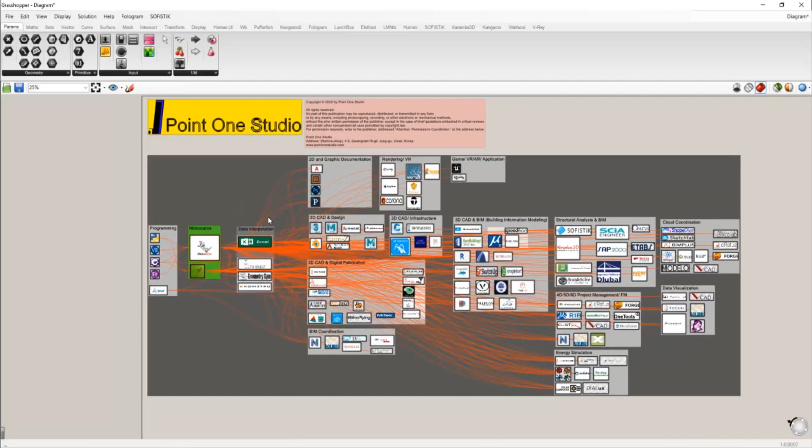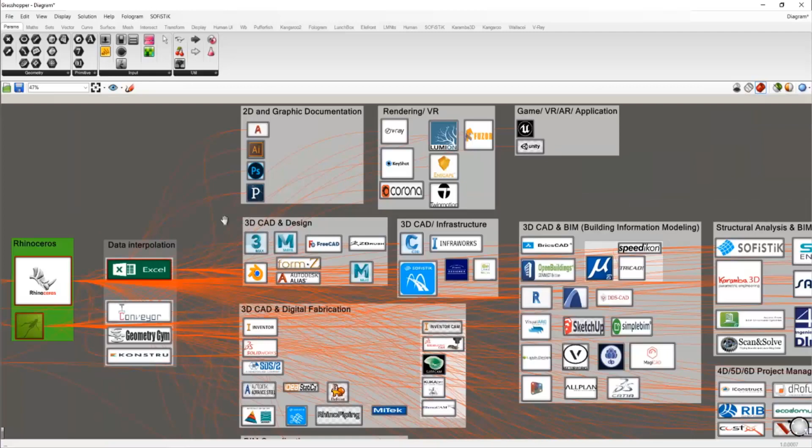So to explain my opinion about Rhino, I have drawn here a simple mind map with software icons. So let's go through each category, and I'm going to demonstrate why Rhino is important. So as you can see, in the building industry, we have many softwares we use between the companies and between the disciplines. And of course, if you look at this data flow, it's quite complex.

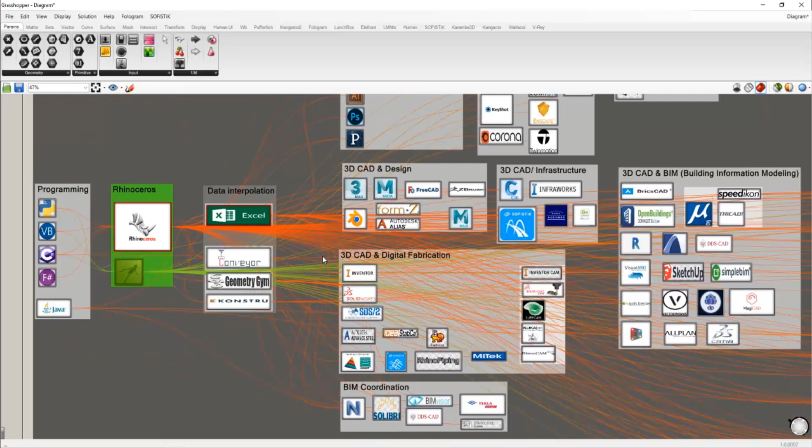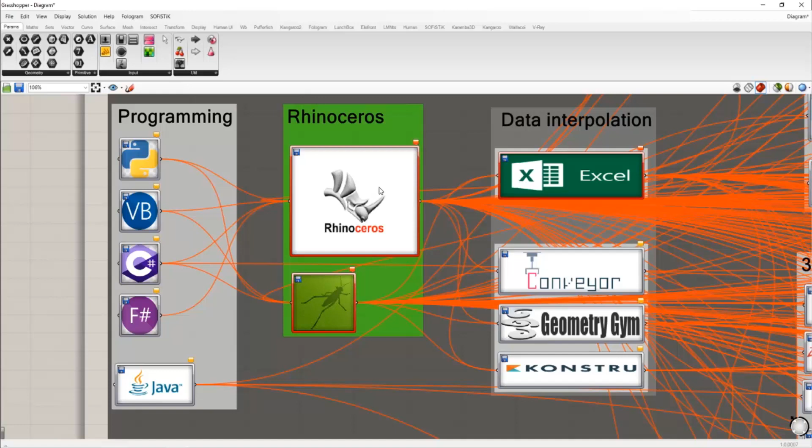I'm just curious myself how much data would be exchanged between the disciplines. Without specifying the format, it's already a very complex mind map. You can take a look. So Rhino is originally developed as a 3D CAD solution, such as for furniture design or product design, and they have extended their function specifically for architecture and engineering in the last couple of years.

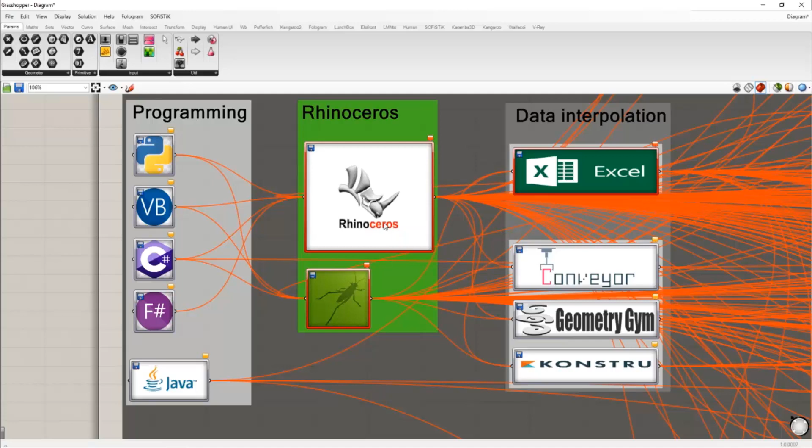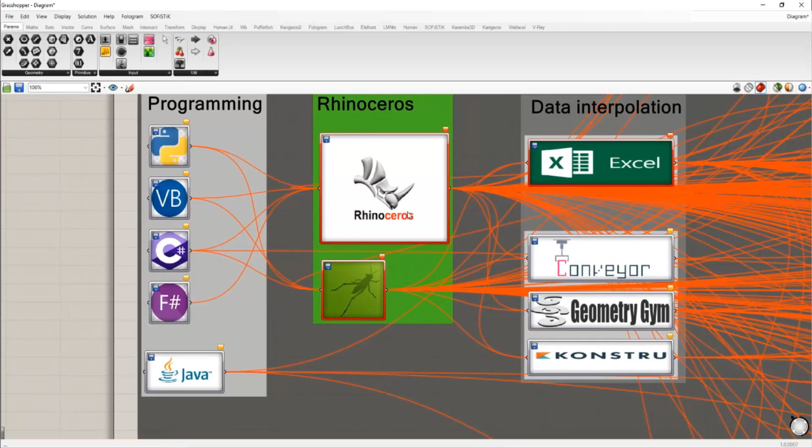And especially since Grasshopper was developed for Rhino, there's huge potential to automate workflows for architects and engineers, as well as designers. Rhino supports different languages, and for example, you can program with Python or Visual Basic, and also C#. And there is also current development with F#. You can integrate with Rhino, with which you can automate your workflow.

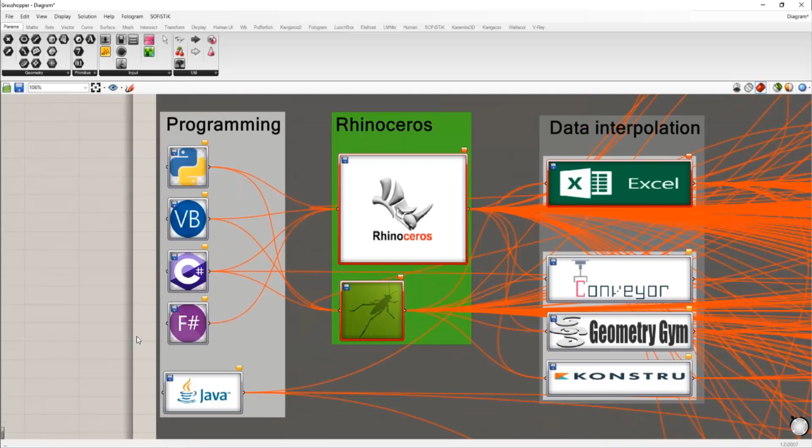Java is not supported, but if you use Java programming, of course, you could maybe use some of the other applications such as Processing, and the Processing result can also go back to Grasshopper. So of course, there is C++. You could also use it, but Rhino doesn't support those languages. Basically, these four languages are the main ones supported by Rhino.

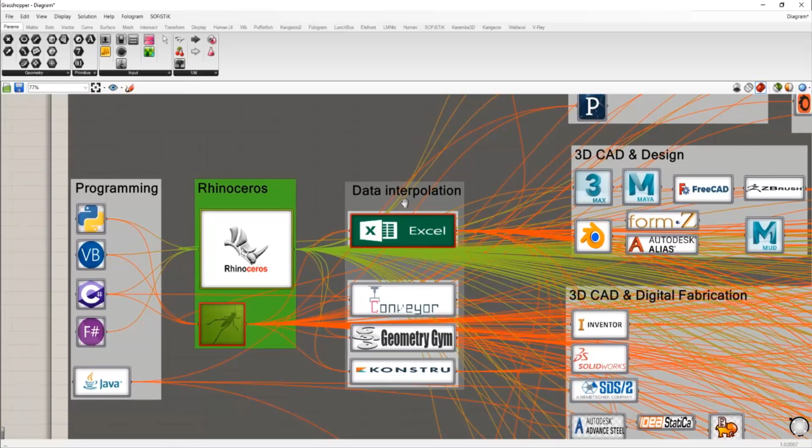And Grasshopper is visual programming, so it supports huge possibilities or potential for the AEC industry. And if you look at the data interoperability, Excel is always one of the key software we can use to transfer different data.

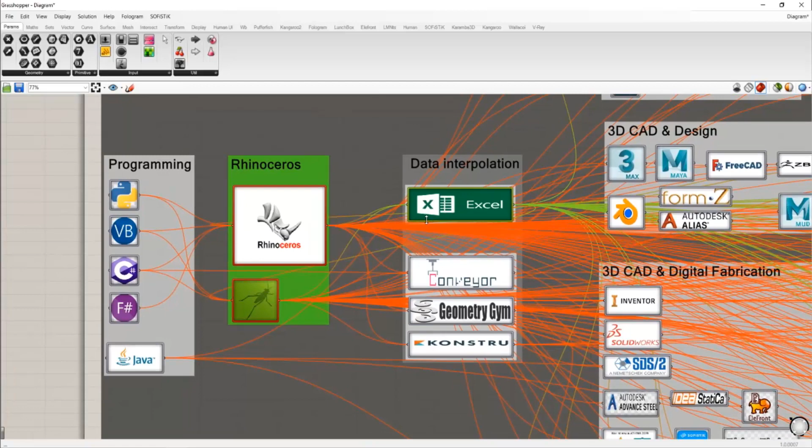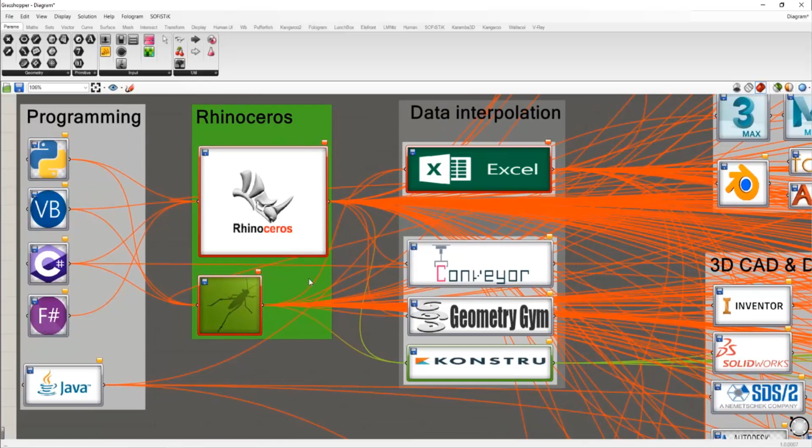And nowadays there are many other packages, for example, Conveyor by Proving Ground or Geometry Gym or Konstru, they are very good solutions that offer Rhino or Grasshopper's output to interoperate the data with the other softwares.

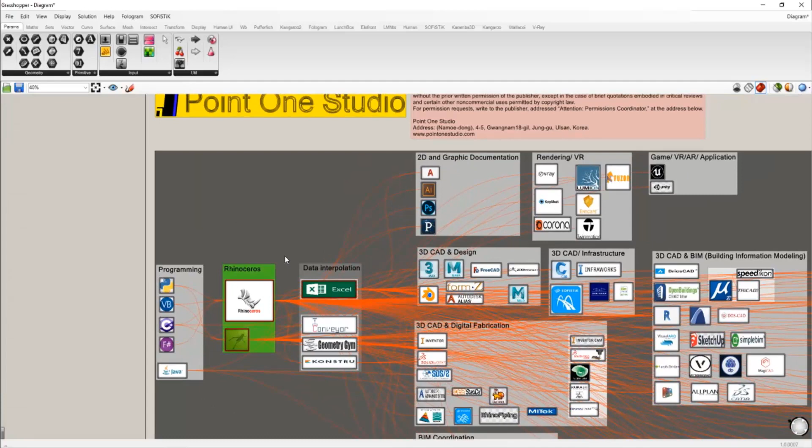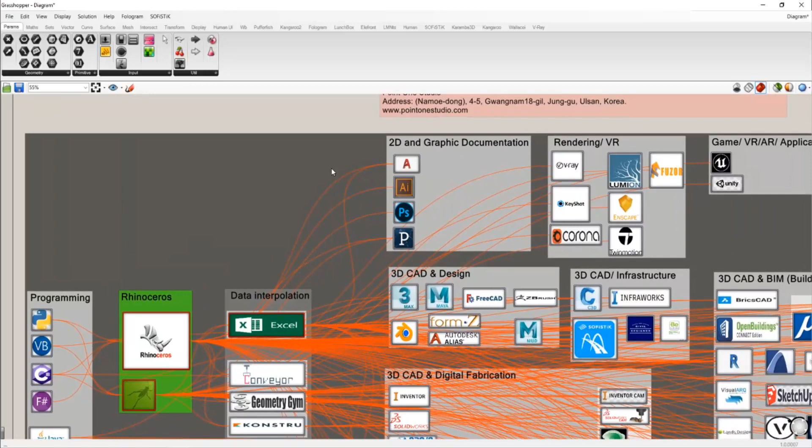Of course, Rhino is mainly a CAD system, but you also have the possibility to have many add-ins, especially for building information modeling. And I'm going to talk about each category here. Of course, for graphics and 2D drafting or documentation, we could also use Rhino to AutoCAD, or Adobe Illustrator or Photoshop, or we can also integrate between Processing and Grasshopper for graphic design.

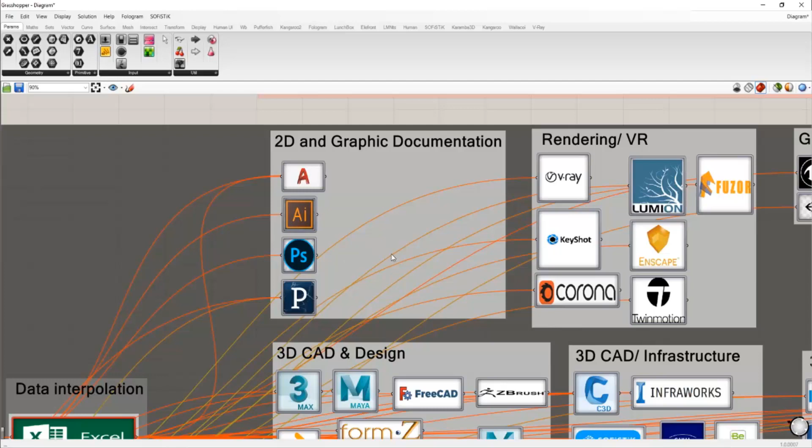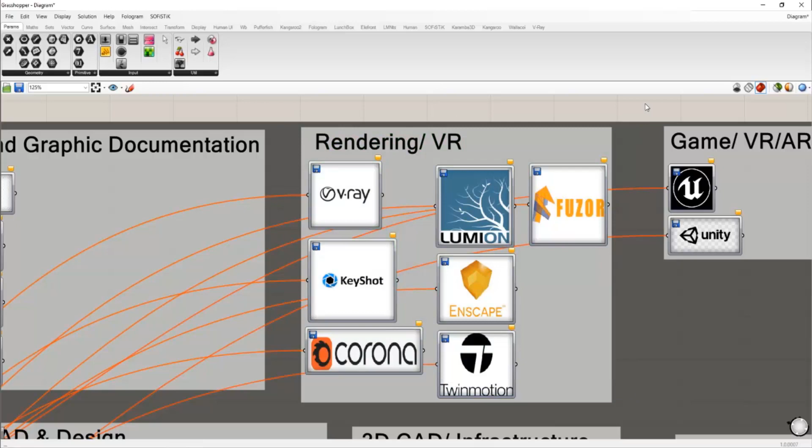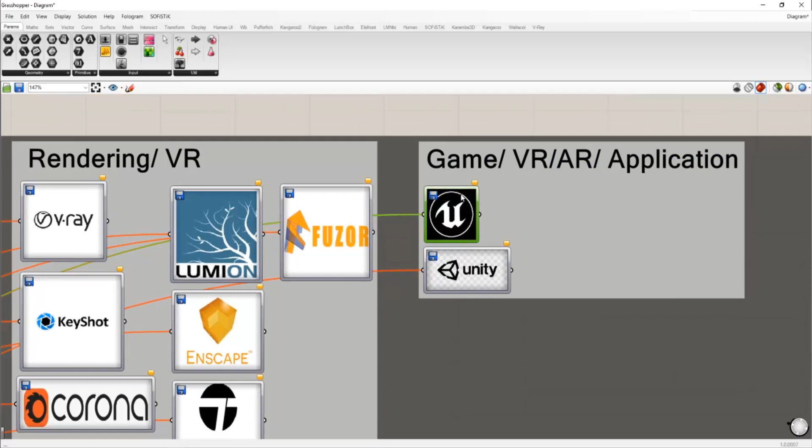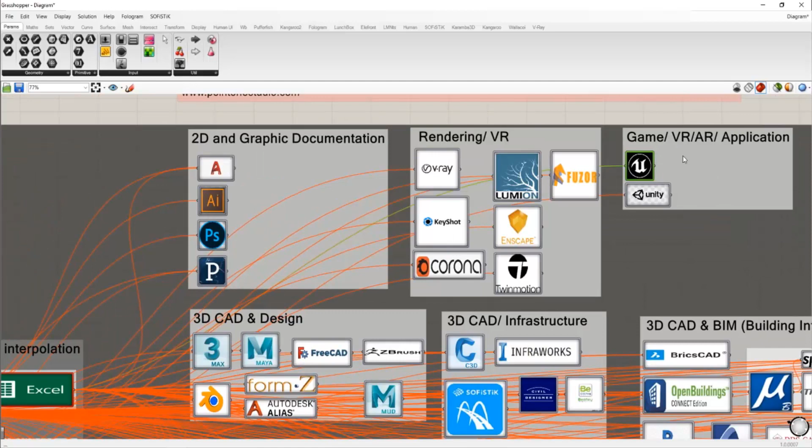And Rhino also supports many different file formats, but especially for rendering, you can be even more flexible with Rhino because Rhino is very simple software. As you can see, most current real-time rendering engines support a Rhino plugin. And also currently there is Rhino.Inside, which works for Unity 3D, or there is Datasmith, which links Rhino's data directly with Unreal Engine. So you can also use your Rhino model in a gaming engine.

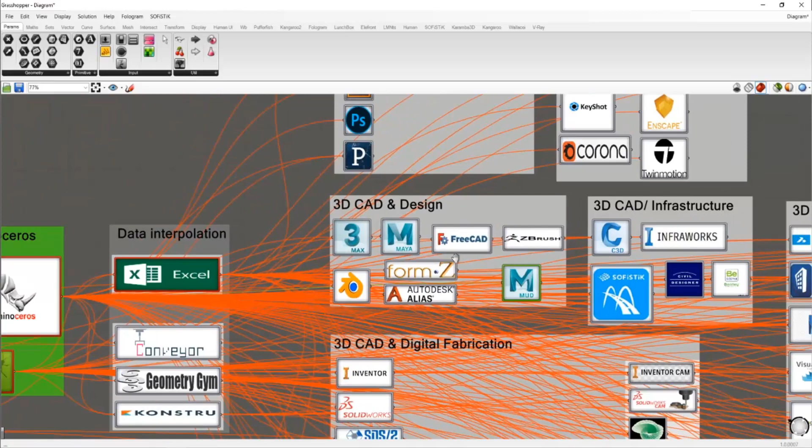Rhino supports many different formats, so we can work together. We can coordinate 3D CAD files from Rhino with 3ds Max or Maya or even Blender, form-Z or Autodesk Alias. And there are many, FreeCAD or ZBrush or Mudbox for 3D sculpture, for artists who can go to an even greater level of detail in their artistic work. And also this Rhino CAD file can be worked with infrastructure software.

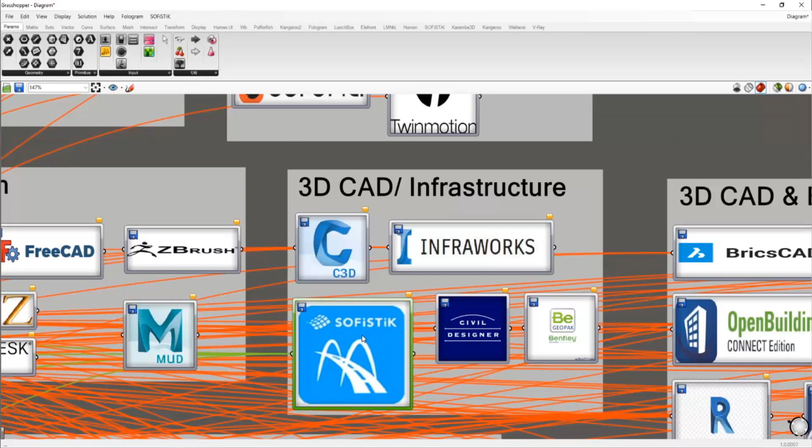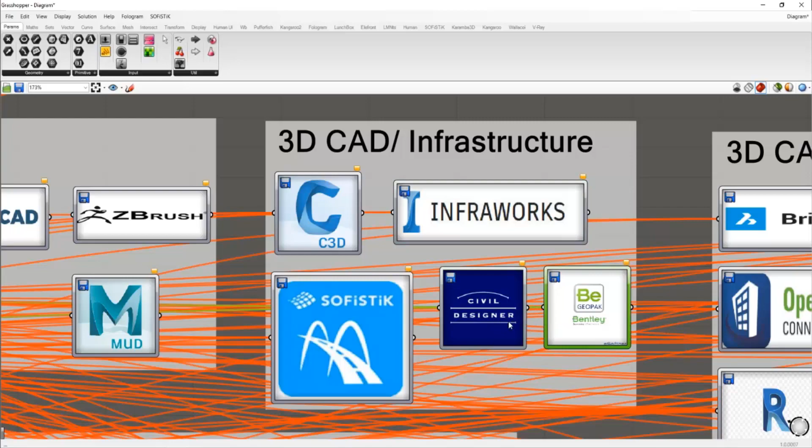Currently, Sofistik developed a Grasshopper plugin for Rhino, and it's really good for bridge design. Rhino supports a variety of CAD formats, so we can also use Rhino's output in Civil 3D or infrastructure. You can also use it for civil design. Basically, we can export a 3D DWG file from Rhino, which means we can use it in any other civil or infrastructure software.

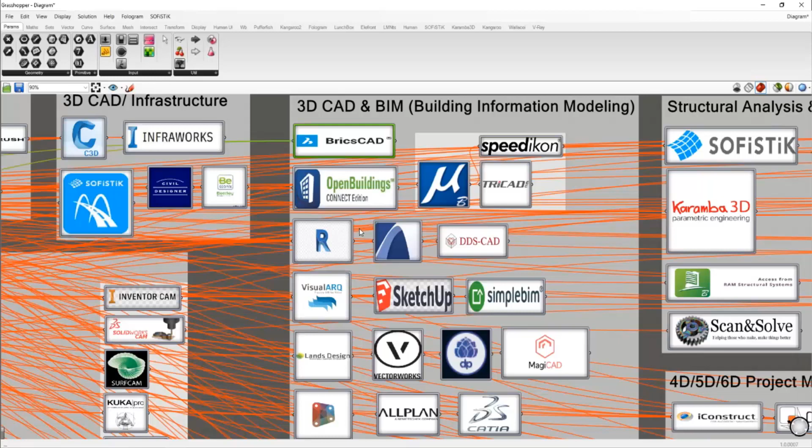What is really interesting for me is also the building information modeling methodology. Many BIM authoring software nowadays support Grasshopper integration with Rhino, especially BricsCAD, or Rhino 7 work in progress. It's called Rhino.Inside, which is going to be integrated with Autodesk Revit. And also the Grasshopper plugin for ArchiCAD works really well.

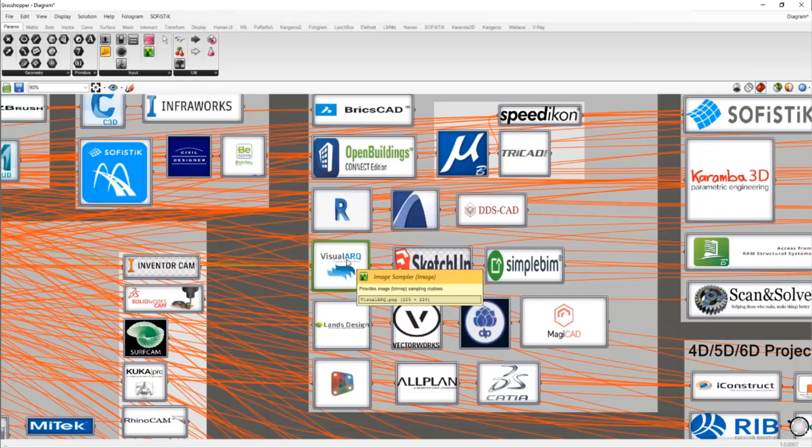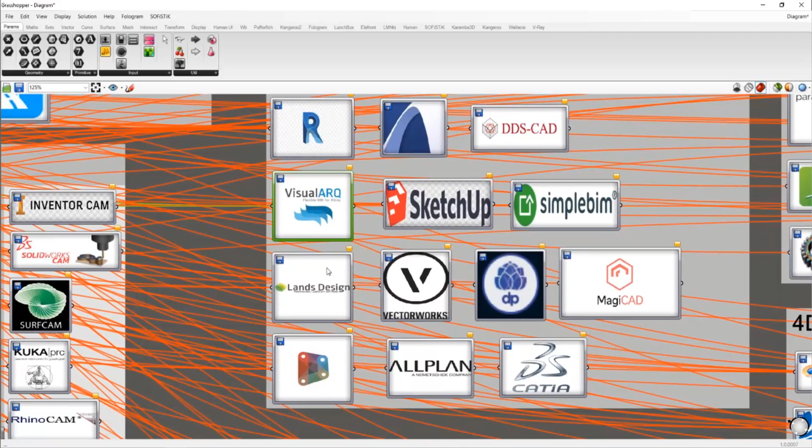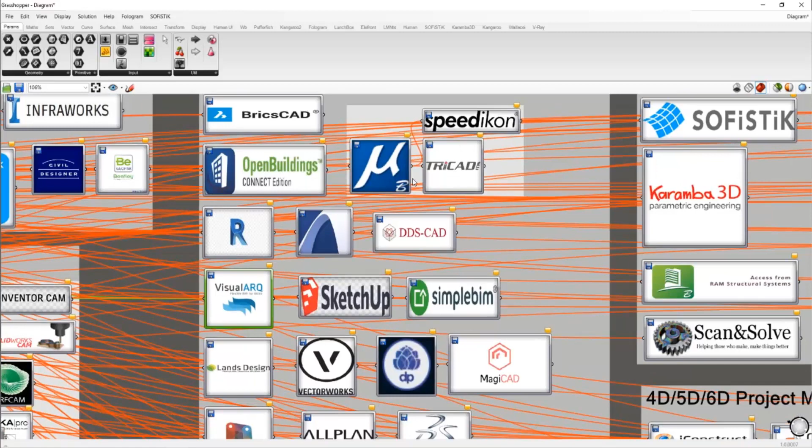VisualARQ is another Rhino plugin, with which we can use the Rhino model as BIM elements. So we can put attributes or IFC classes or parameters on Rhino elements, and we can use it as a BIM software. It also supports land design or landscape design and any kind of format. If we use Rhino, you can also script an IFC exporter yourself, and Rhino elements can be used for any kind of BIM software, because BIM authoring software mainly supports the IFC file format.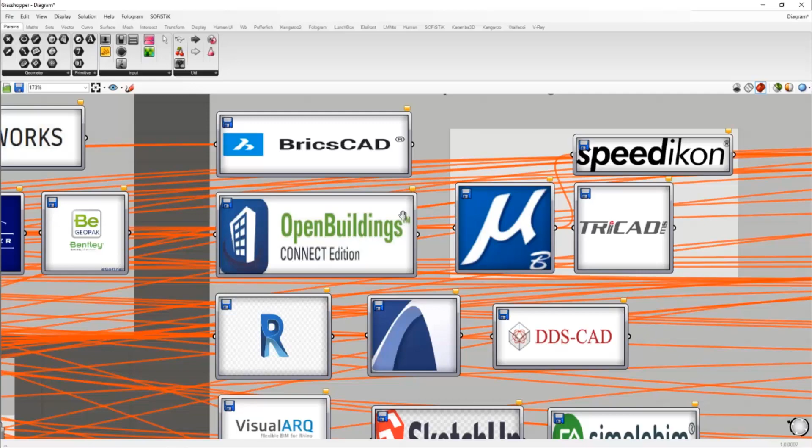For me, I'm very interested in OpenBuildings. They have currently developed quite a lot of BIM functions on top of MicroStation. And when I tested it with Rhino, when you import a Rhino 3DM file into OpenBuildings, it supports all the layers from Rhino. Which means even though there is no direct connection, we can basically use the Rhino file to work with building information modeling.

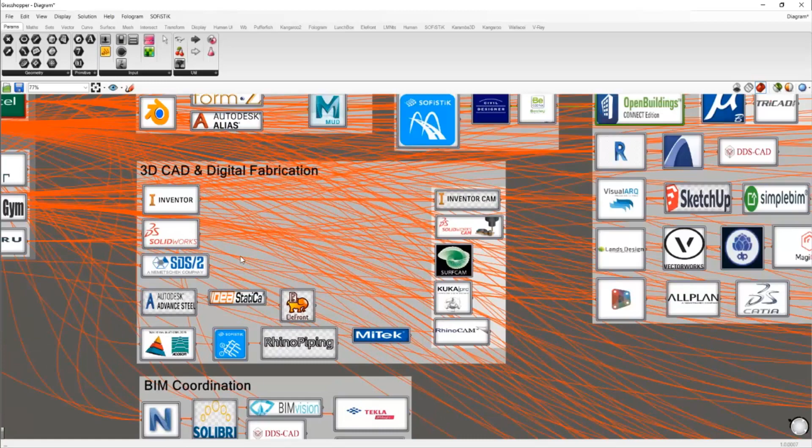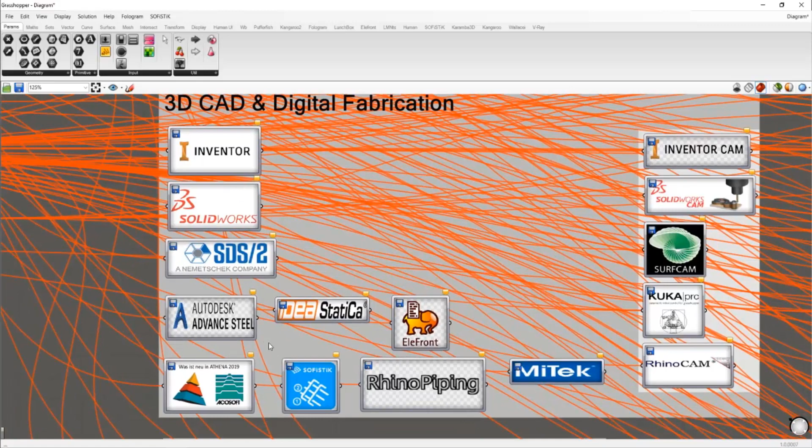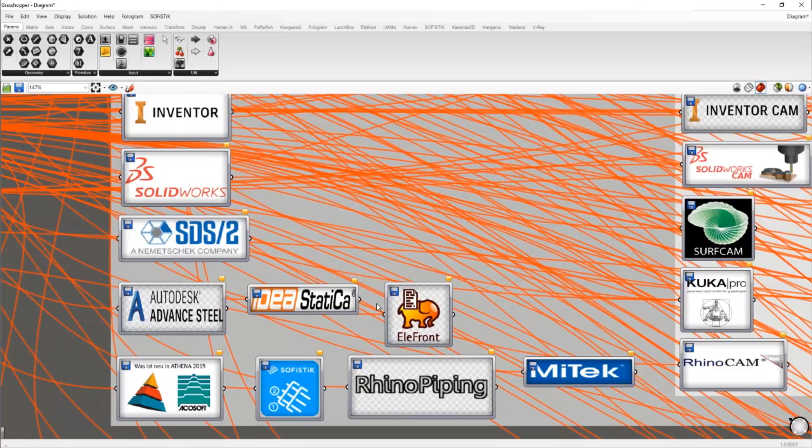And in 3D CAD here, there's Inventor or SolidWorks or SDS2, Autodesk Advance, or here Acosoft's Athena, which is really good for curtain wall kind of prefabrication, almost final detail, LOD 400 or beyond, so we can really finalize your detail. And most of these software basically read the 3D DWG file or Rhino file format, so you can really make your detailed model with Rhino to be able to use it for digital fabrication.

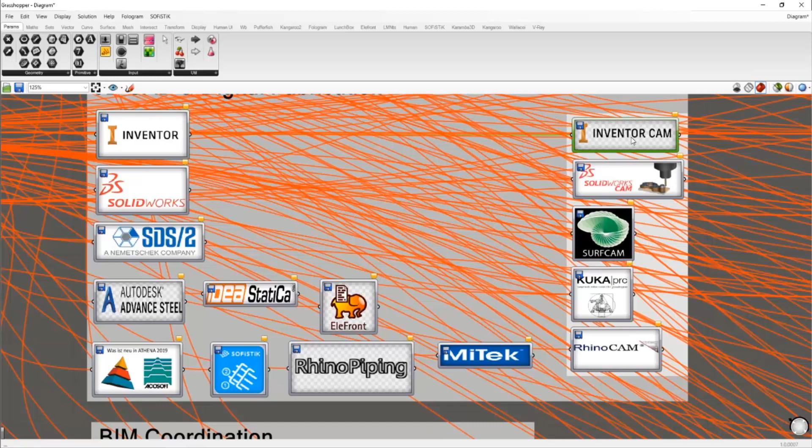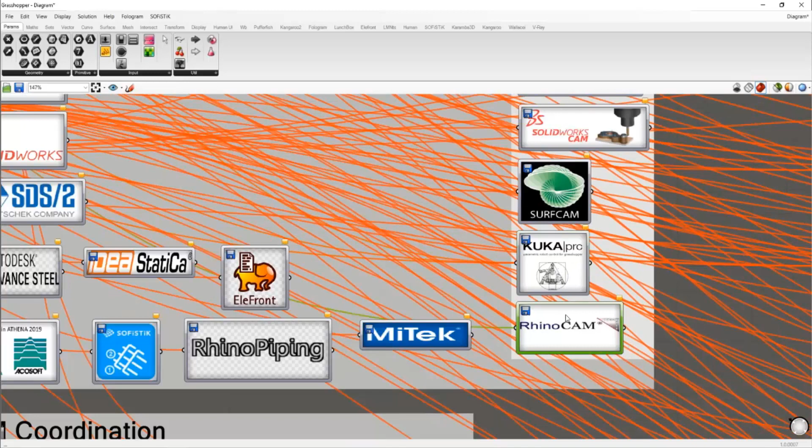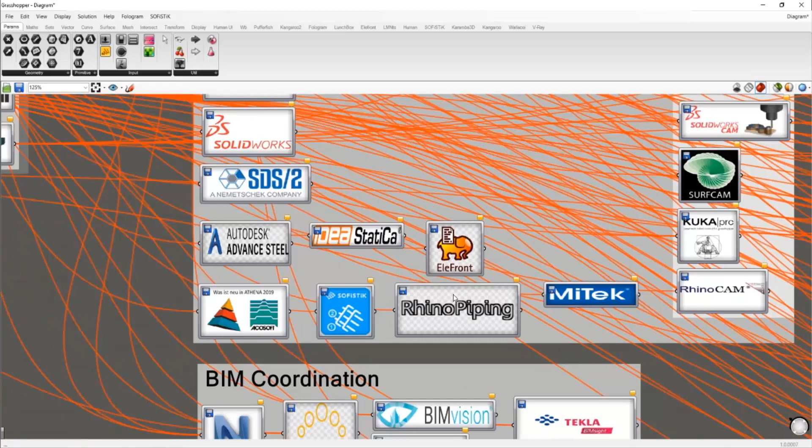So we can import the Rhino model to Inventor, and we can use Inventor CAM, or SolidWorks CAM or SurfCAM. Also Grasshopper and Rhino have a KUKA plugin, so you can use it for robotic fabrication, or you can simply use RhinoCAM for your milling machine. Or from MiTek from Canada, you can also use the Rhino model for very detailed timber structure models, or there is also development of MEP components, piping components, from Rhino. So you can achieve really detailed models with Rhino.

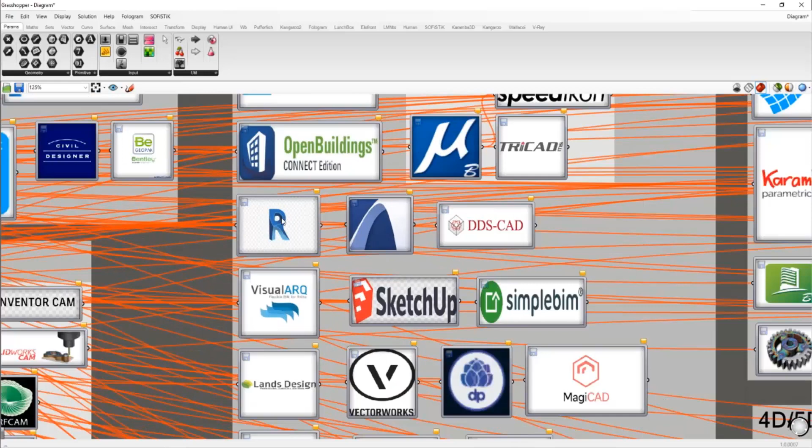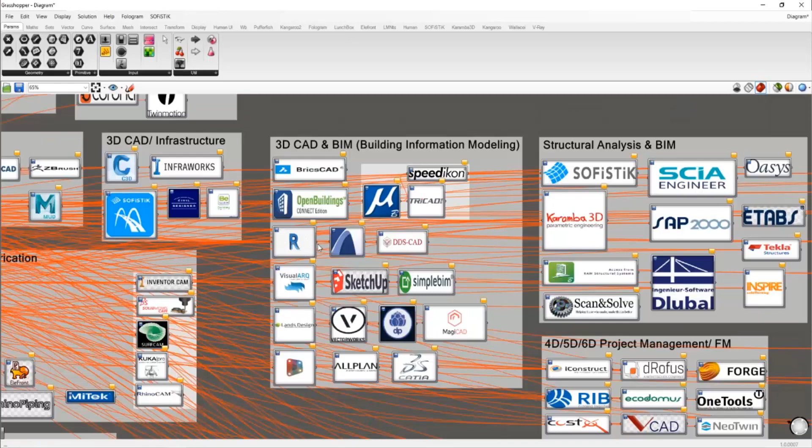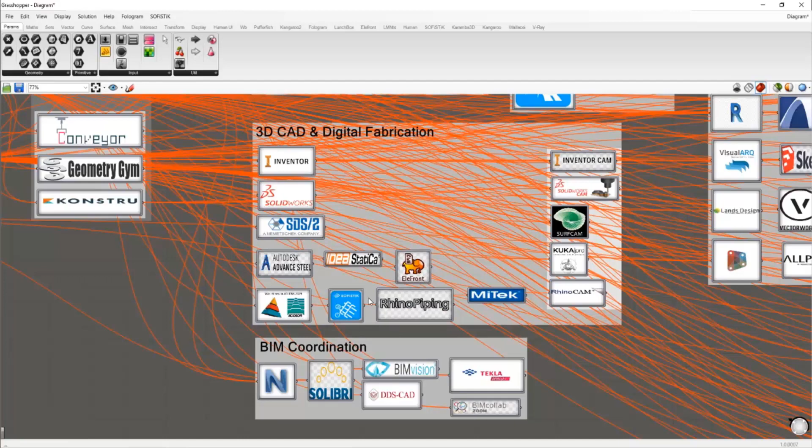Sometimes if you use just standard BIM authoring software such as Revit, it's really rigid and there's a limitation to making a very detailed model in Revit. Of course you can make it, but it's not very efficient. So using more precise CAD software such as Inventor or Rhino, you can deliver an almost as-constructed model for your finalized detail.

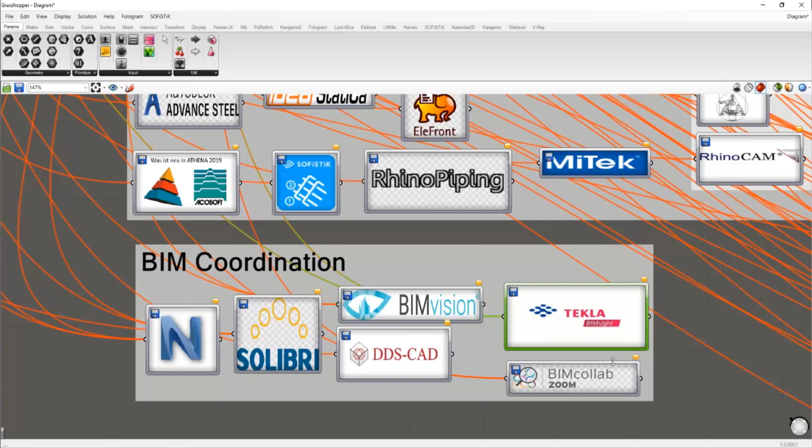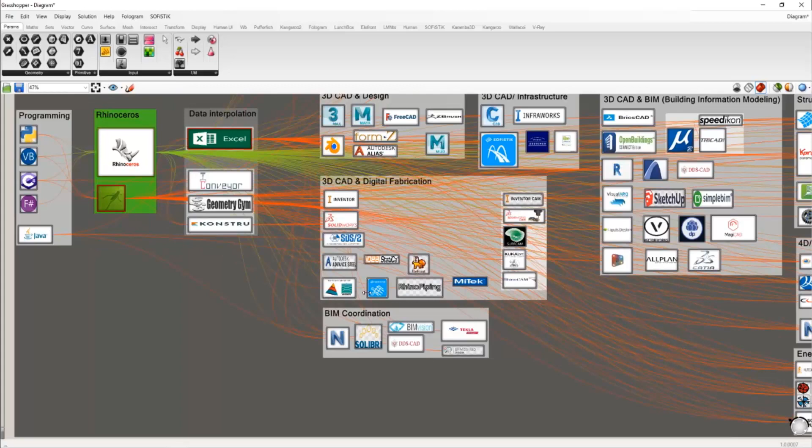Also, the Rhino model can be coordinated in Navisworks, or you can export 3D DWG to use in Solibri, or you can script an IFC export to Solibri and coordinate your Rhino model. Or there is BIM Vision, DDS-CAD Viewer, Tekla BIMsight or BIMcollab Zoom. They mostly support IFC files, or DDS-CAD, Solibri or Navisworks support 3D DWG files. So you can simply export your Rhino model to coordinate with different BIM software or 3D CAD software.

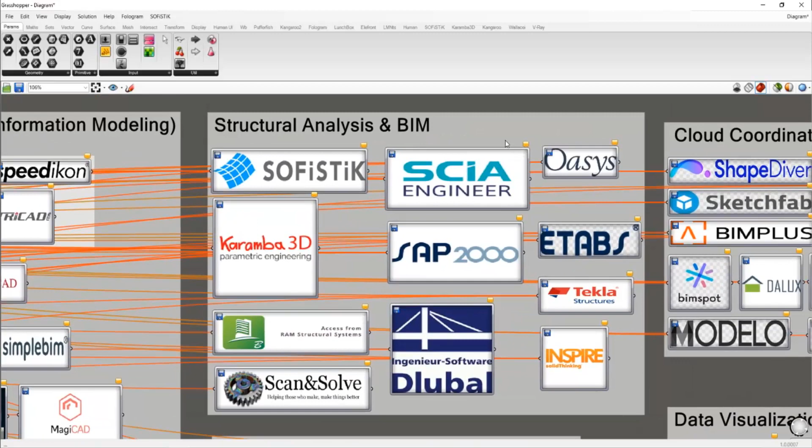What's very interesting is also that Rhino currently has many structural analysis software such as Sofistik or Karamba3D, SAP2000 or SCIA Engineer, or ETABS, or Dlubal's RFEM. They all now have a Grasshopper plugin for Rhino, so you can directly link your structural calculation model to that calculation software, static software, which is also very nice.

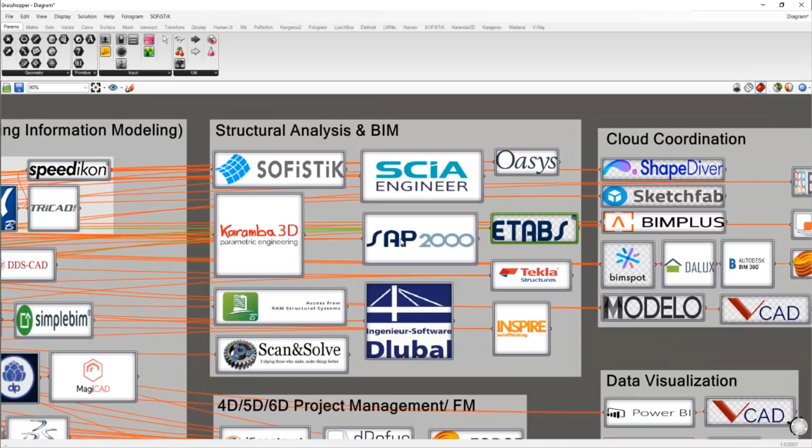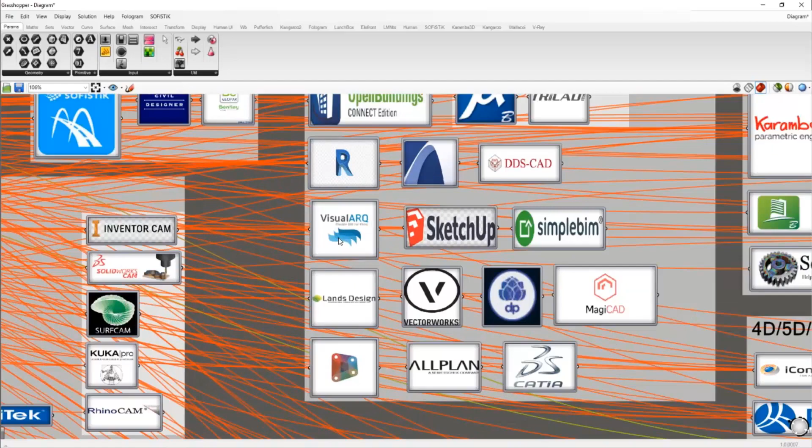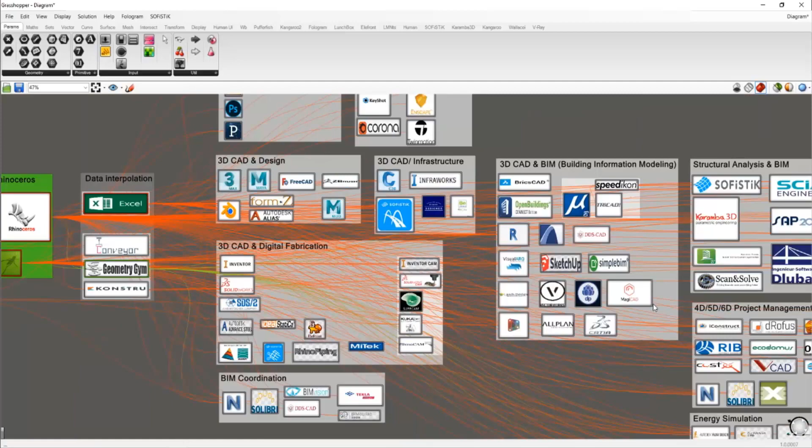And of course, these 4D, 5D, 6D simulation or project management, as well as facility management software, they are not really related to 3D DWG file or 3DM file, but since Rhino can export IFC file with certain plugins, for example, VisualARQ, or if you use Geometry Gym, you could convert your Rhino model to IFC file so that you could use your Rhino model for project management software such as iConstruct for Navisworks, or dRofus, or Autodesk

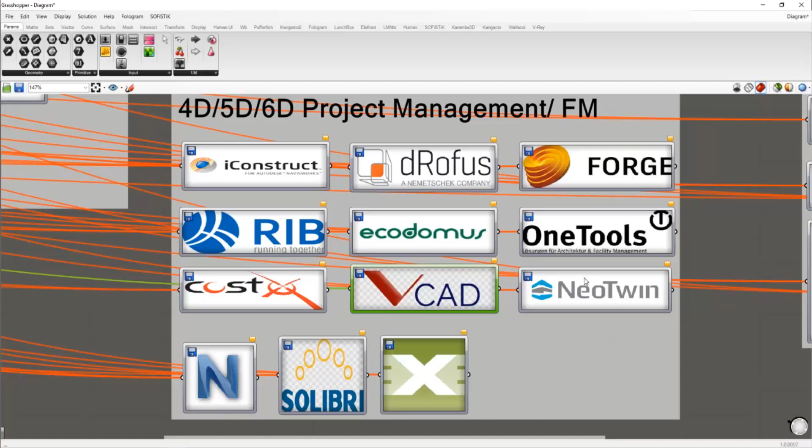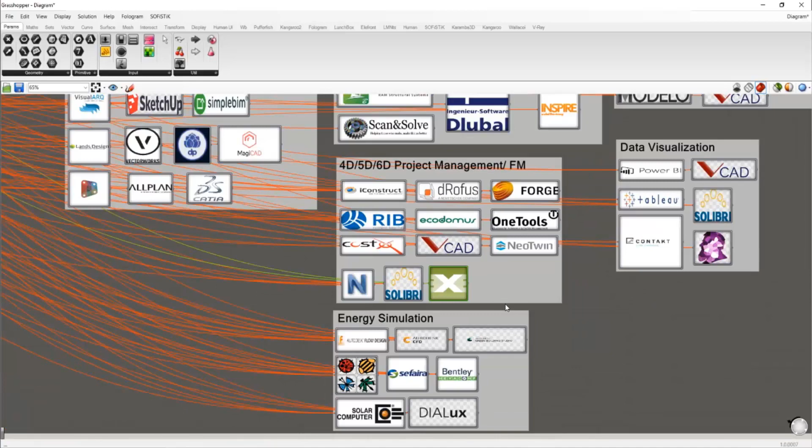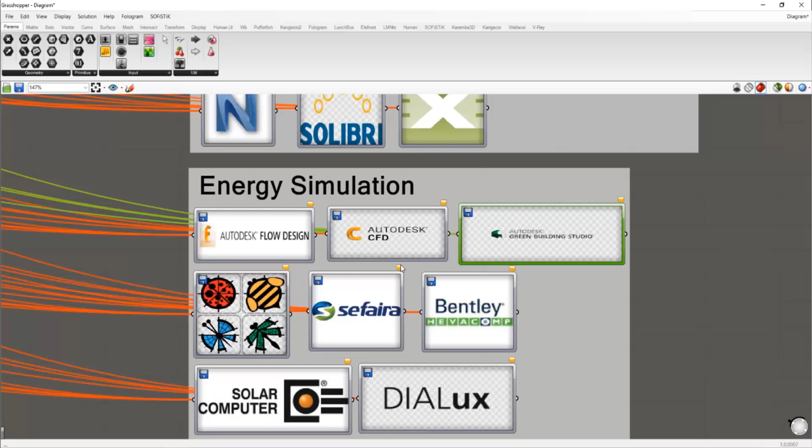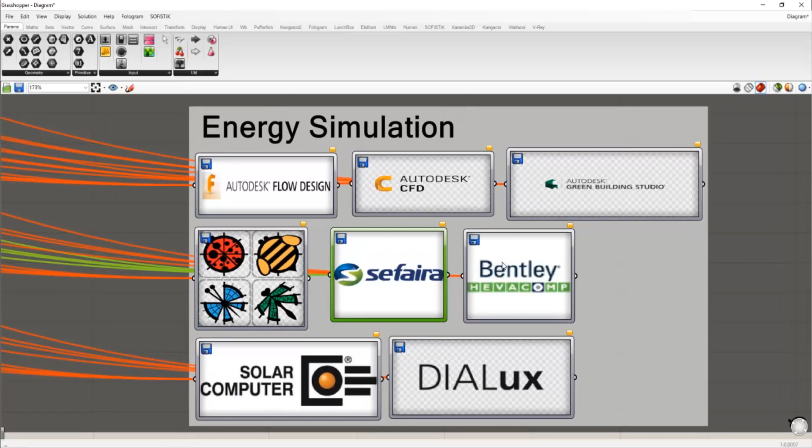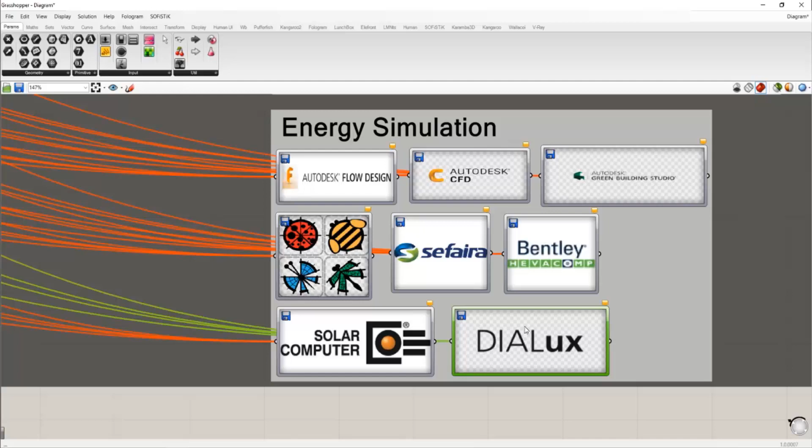And also Rhino model can be used for energy simulation, such as Autodesk Flow Design or CFD. Of course, if we use IFC file, we can push it as far as Green Building Studio. Or if you use the Rhino Grasshopper interface, then we can use Ladybug. Or Rhino model can be exported to SketchUp or Revit, and we can use Sefaira for more energy simulation, and also Bentley products, or some of the mechanical analysis using solar computer, or DIALux for electrical lighting analysis. We can always use Rhino model to simulate more analysis.

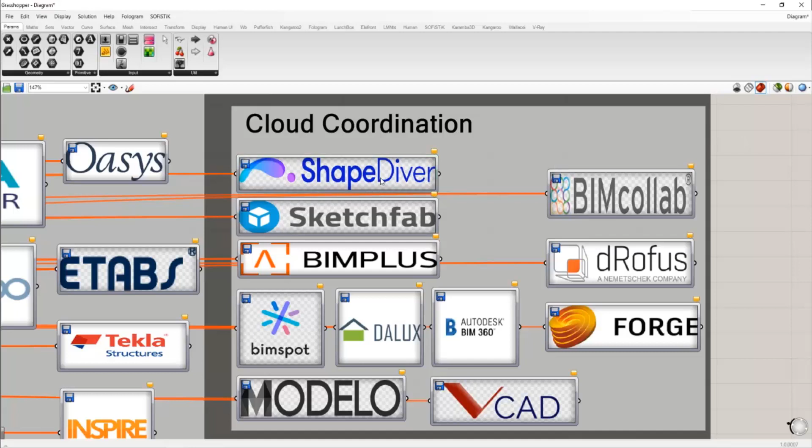And Grasshopper's model, now by ShapeDiver, we can also display or present a Grasshopper parametric model in a cloud environment, or you can simply export different CAD formats to display in Sketchfab or Modelo, so you can show your model or share your model with different project teams. BIM 360 or similar, it also supports mainly IFC file format, but since we can export Rhino model to IFC, you can also use any of this sort of software in a cloud system.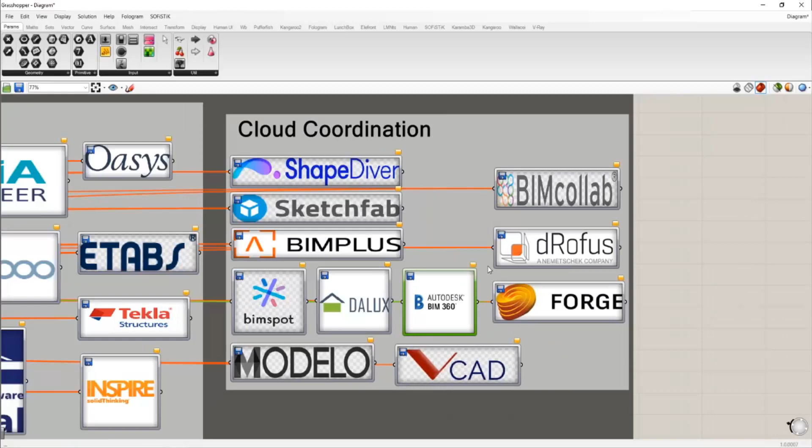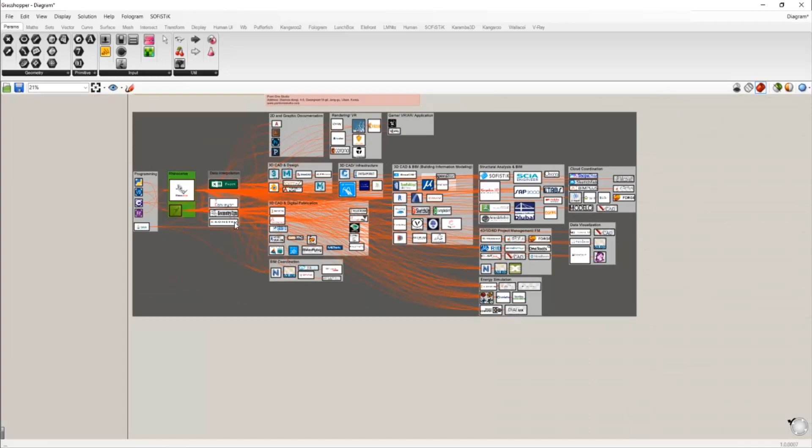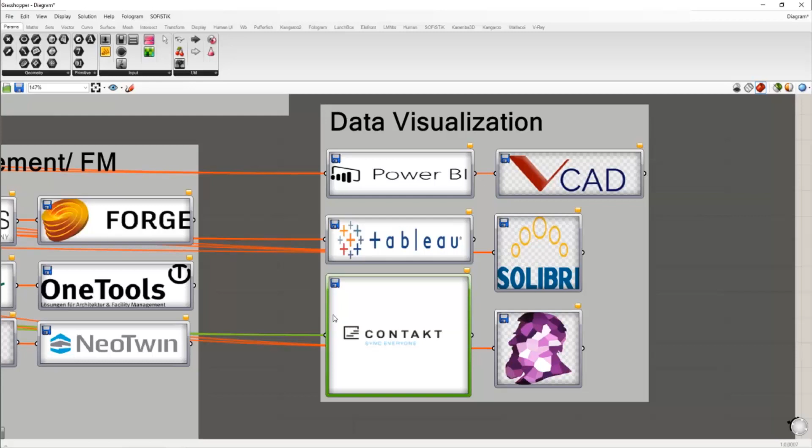You can also use your Rhino model by scripting from Grasshopper, or you can program with C# or other programming languages to send it to Power BI, or this Power BI model can be graphically visualized in VCAD or Tableau, or there's also a great data analysis service called Contakt, where you can collect your field conditions data and then synchronize it through the sensor with a sort of data visualization application. And you can also optimize some of the parameters with Wallacei, or you can also use your Rhino model to specify or analyze the data through Solibri, which is also possible.

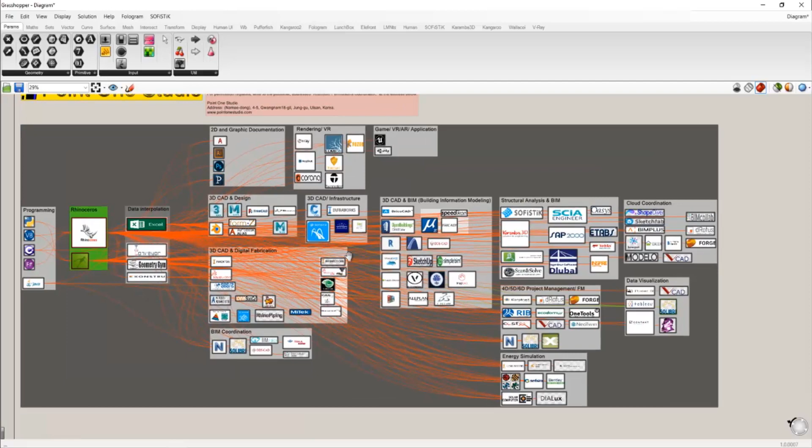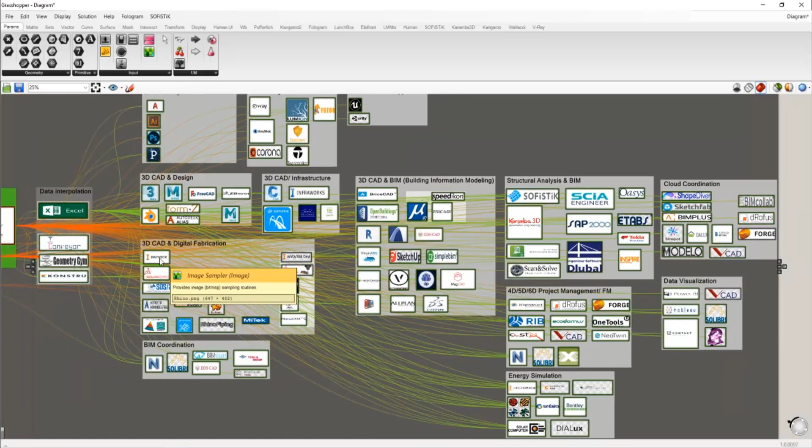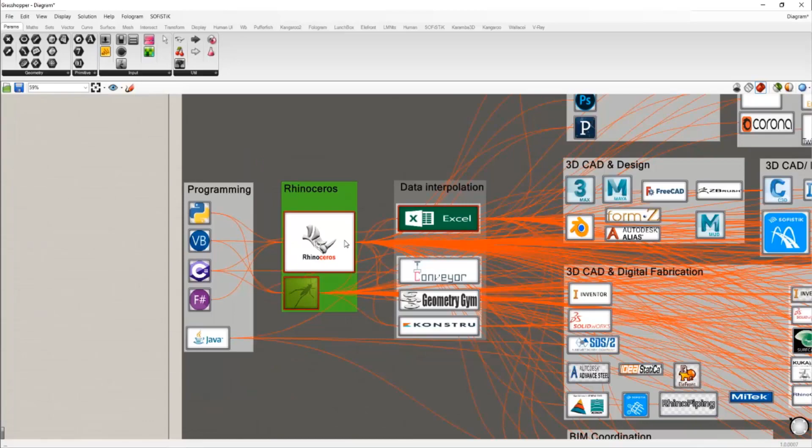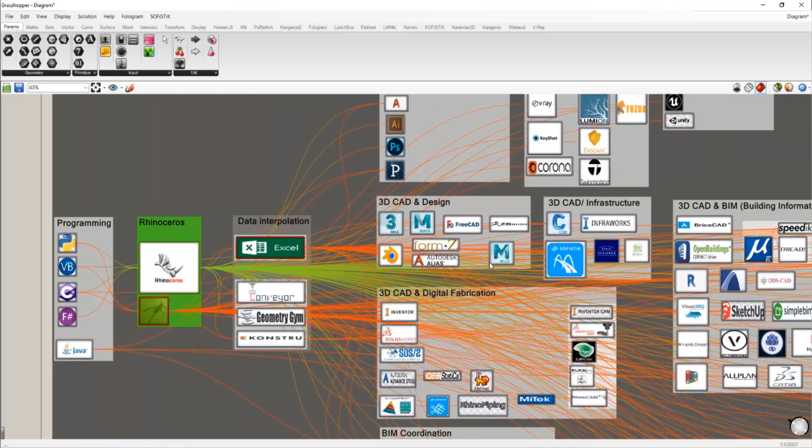So as you can see, I'm not talking about every software in our industry, but some of the major software which Rhino can support, so that all this data flow can be done by Rhino. But I'm just very surprised that not many users or architects or engineers are actually using Rhino. So I just want to demonstrate why we should use Rhino. And Rhino is really sustainable software. McNeel is developing or upgrading the software regularly, and they always respond to the community's feedback. So I really recommend starting to use Rhino. Especially, Rhino will be kind of a Swiss knife for BIM workflow.

So guys, if you're considering whether you should use another software or should run Rhino, then please don't hesitate. Go for it. I really think that Rhino is one of the best software to make many impossible things possible. So I think that's all for today.

And I would like to show in the next video the top 50 commands for architects and engineers to use in Rhino. Actually, you don't really have to use 100% of Rhino's functions to work in the AEC industry. If you know more or less 5 to 10% of commands from Rhino, then you can manage almost all kinds of AEC projects, as well as infrastructure projects.